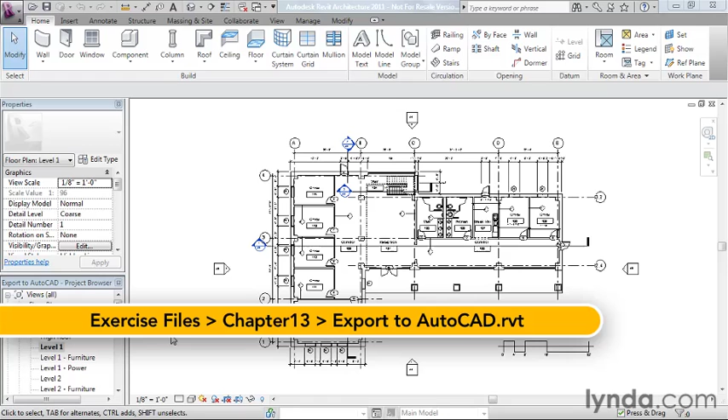However, Revit is also fully capable of exporting directly to AutoCAD's native DWG file format. In this movie, we'll look at the steps to perform such an export. So I have a file here called Export to AutoCAD, and we'll go ahead and walk through the steps of exporting it out to an AutoCAD format.

We go to the application menu, and under Export, we've got CAD formats, and Revit is capable of writing a DWG, a DXF, a MicroStation DGN, or an ACIS SAT file. Let's go with DWG formats. And we'll get a box that looks very similar to the one we were in when we created a DWF, if you watched the DWF movie. We have similar options that are available here.

We're going to start at the very top and choose our in-session. Unless you are positive that all you want is the current view or sheet that you have on screen, you're typically going to want to use the in-session view or sheet. So if all I wanted was a floor plan for the first floor, then I could just do current view or sheet and click next and be done. If you want to export more than one view or sheet, then it's always a good idea to do the in-session view or sheet. Then we've got show in the list.

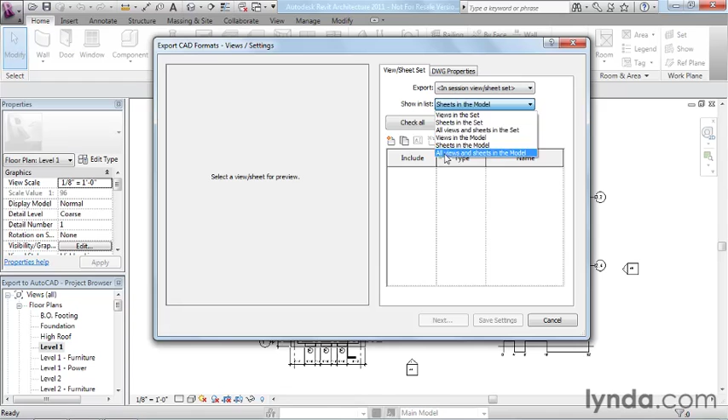In this case, I'm actually going to export a combination of views and sheets. So I'm going to choose this option down here, all views and sheets in the model. That means this list will include everything. It'll include all the things in the project browser listed under views and all the things listed under sheets. I'm going to scroll down and locate my sheets. And I want to export a couple floor plans, and they're both on the floor plan sheet, so I'll just choose that one. And then I also want to export some 3D views.

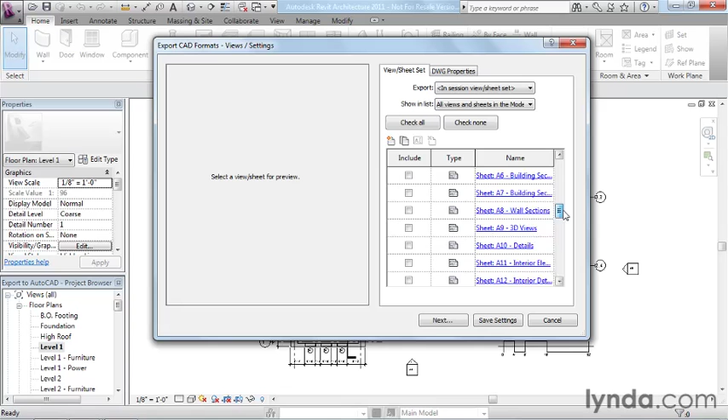Now, depending on what you export will determine what kind of geometry goes over to AutoCAD. So I'm choosing two different kinds of files on purpose so that we can see the difference when we get over to AutoCAD. So this one's going to actually generate 3D geometry on the AutoCAD side. And the plans that we have here in the sheet, that's going to generate simple two-dimensional geometry on the AutoCAD side. Now on this tab, we have some DWG properties. Most of the defaults should be fine. If you're an AutoCAD user, you should be familiar with what most of these things are.

I'm going to go ahead and click Next. Here, I will just input a name. I'm going to accept the default with the automatic naming. And I want to just point out this one little checkbox here. For the sheet, the export to AutoCAD can actually XREF each of your plan views onto a separate sheet file in the sheet view. So let me show you what I mean when we click OK here.

Okay, when the export is complete, I have AutoCAD running in the background, and we can do Alt-Tab to switch over. And I'm going to click the Open icon. And you'll see that even though we only exported 2 items, we actually have several AutoCAD files. Now let's start with the 3D view. This one, if you look at the preview, you can see the site plan exported separately from the building, and both are 3D models. Let's go ahead and open up the composite of the two.

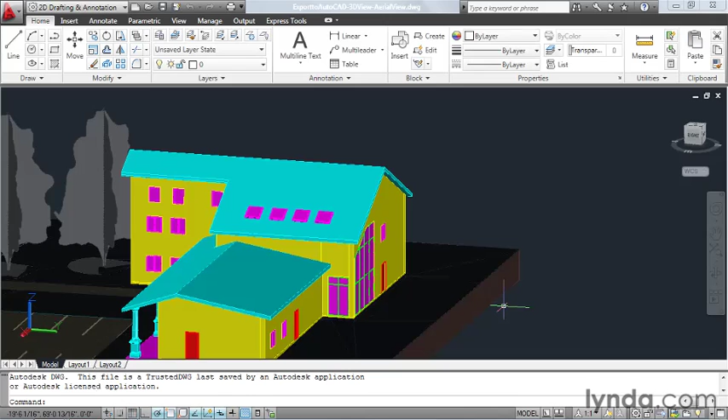Now AutoCAD shares the same view navigation tools that Revit does. So we have our view cube over here, and we can spin around to any view that we like. We can hold down the Shift key and orbit the view. And we can roll the wheel to zoom in just like before. Now everything is color-coded because what Revit will do is actually take each of its object categories and map them to an AutoCAD layer. So for example, if I select the items here on the roof, they went into a layer called 3D roof. And the walls would be in a layer 3D walls and so on.

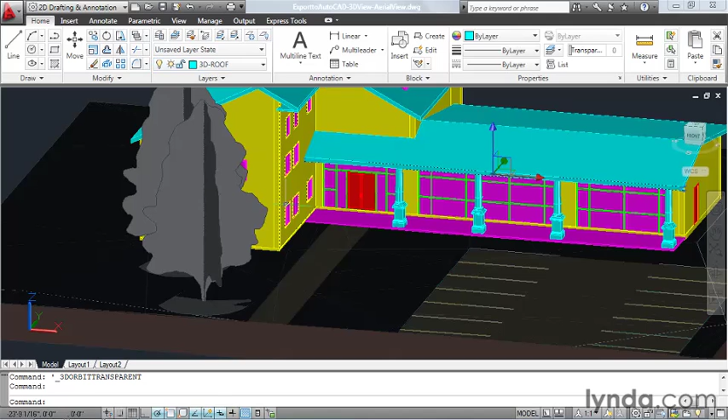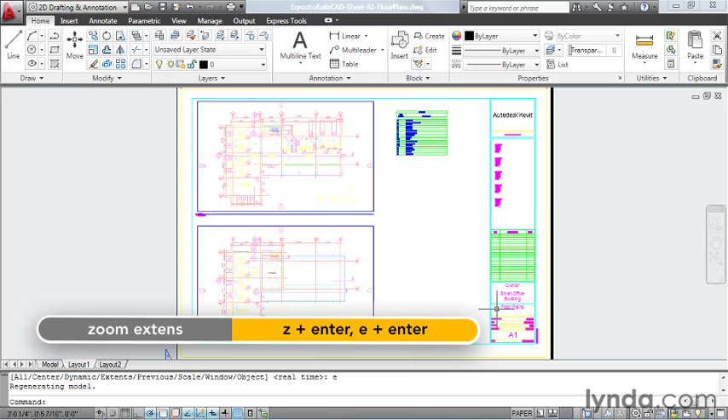Let's open up the 2D drawing. And here you'll see that we get one drawing that includes the sheet and its title block, and then each of the viewports exported separately as a separate drawing and are XREF'd into the title block. So let's go ahead and open up the title block. I'm going to type Z enter, E enter, which is zoom extents in AutoCAD. Select the title block, and you'll see that it came in as a sheet file.

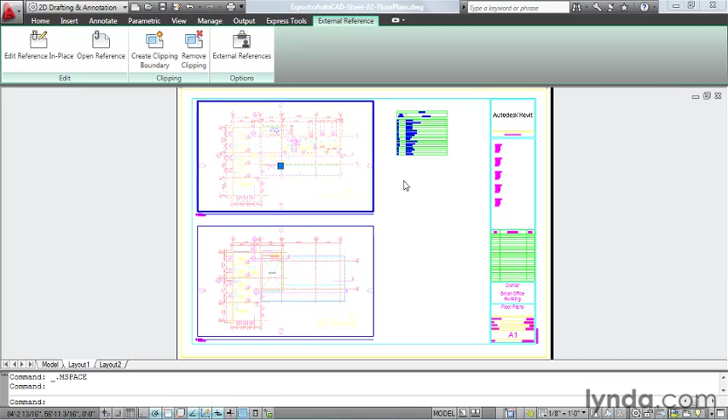Here are the individual viewports. And if I double click in that viewport, you can see that each view actually came in as a separate AutoCAD drawing. And up here on the ribbon, you can see that's actually an externally referenced drawing. So that accounts for why we had 3 separate drawings for this single sheet.

I'm going to switch back over to Revit. And on the application menu, under Export, and then Options, there's the Export Layers DWG/DXF. And when I choose that, this dialog here is what controlled the layers that were used on the AutoCAD side and the colors that were used on the AutoCAD side. So the fact that everything was color-coded and came in on different layers is all controlled right here in this dialog, and I welcome you to explore it and change it if necessary to match your office standards.

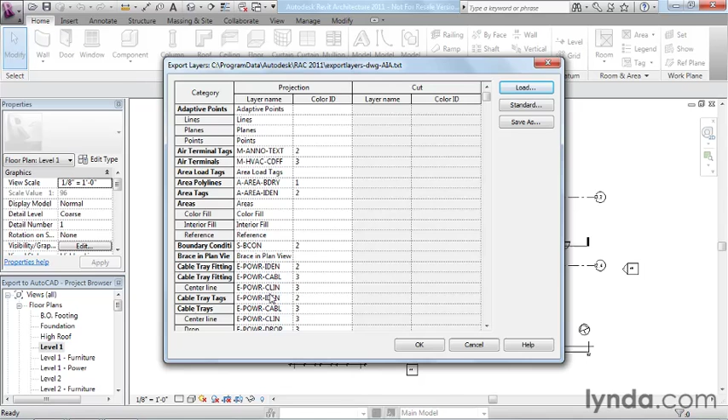So that's the process to exporting files to AutoCAD, and you can do that whenever you need to share files with a team member who's not yet on Revit.